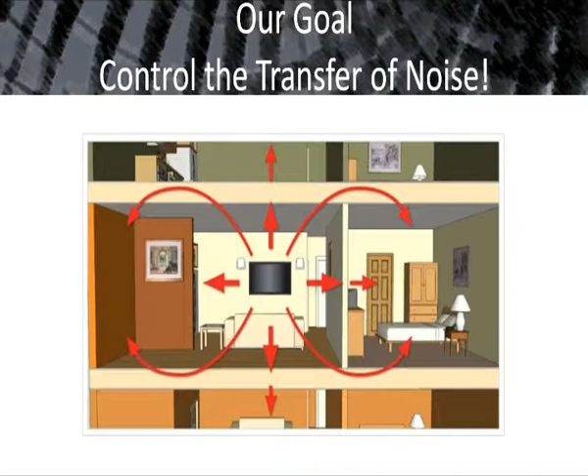So can anyone tell me what the building code is for entry-level housing? STC 50, thank you. All right, so entry level is giving us a STC rating or an ASTC rating of 50. That's what the code says we have to have between units.

What do we have to have between market rate? Does the code talk about that? 50, very good, there's no difference. What about for luxury? 50, okay. So the building code only speaks to minimum quality construction from an acoustical point of view, and that's our challenge.

How many people here are architects, designers? How many people are developers? Engineers? Manufacturers, building component people? Okay, a few, all right. So we got a good group.

So these are our challenges, is establishing expectation. And our biggest expectation issue is when marketing gets involved. We may be sitting at those design team meetings and the expectation is, oh, this is going to be market rate, and all of a sudden the flyer comes up and it says it's luxury grade. Those are our challenges.

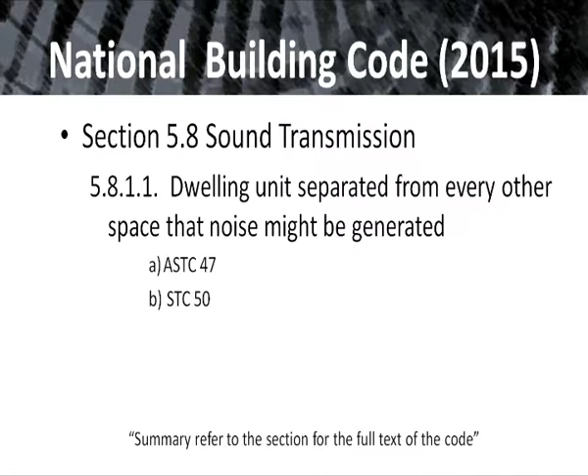As we go further, they're looking for elevators or sleeping units within the same area to be separated by 47, so say in a hotel type facility like we have here. Elevator shafts and trash chutes, those types of things - they're looking for a rating of 55 separation, which is great. We don't have anything like that in the States, it's just 50.

A part that the Canadian Building Code is silent on is impact isolation. So that's the footfall noise, that's the thump thump. That's the person walking around in the hotel room above me all night long, thump thump thump thump thump thump. So that's a challenge.

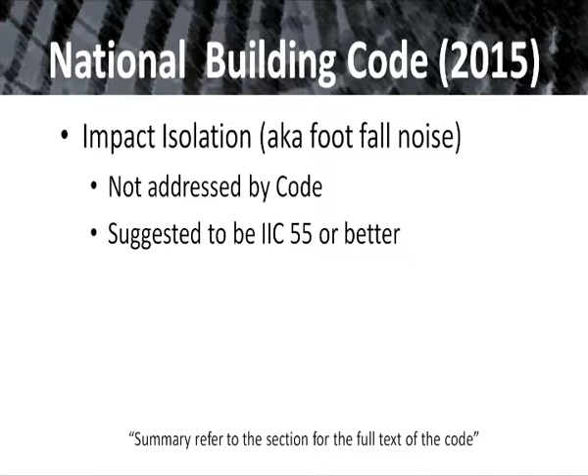Something else that we're looking for is exterior to interior. Now that is not an issue as much here in Canada as it is down in the south where our Raleigh, Durham, and our Orlando offices are, because typically the windows in my house in San Francisco aren't insulated.

Now I grew up about 50 kilometers south of here, in Michigan, and went to school about 300 kilometers north of here, again in Michigan, in the middle of Lake Superior. I know what cold is, just as you do. So having the thermal wrap of our dwelling units takes care of most of the exterior to interior acoustical issues that we have. Having gaskets on doors, windows that are sealed, building insulation, that takes care of it. So that and fire ratings are my two favorite friends. If I have a fire rating of an assembly, that's generally going to help us acoustically.

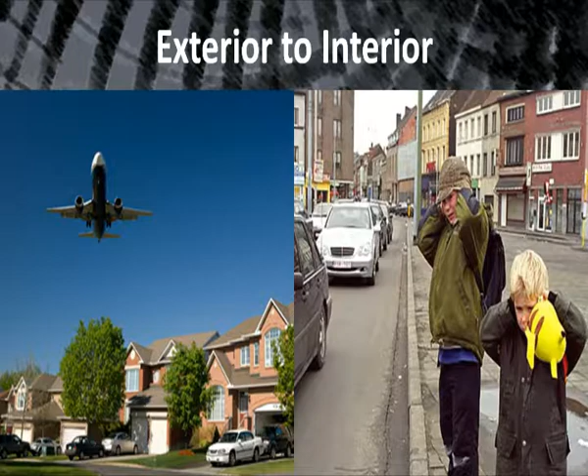Challenges we have when we get into mixed use is what is that separation? This is a project that we did, 2 miles south of our Raleigh-Durham office. We talked to them about having isolation between the commercial units on the lower level and the housing above, 3 stories of housing above. Wood frame - they wouldn't listen to us, said oh no, it's not a problem.

Well, we got a call in - how do we fix Buffalo Wild Wings when they have open mic night? Not only is it loud, it's also bad from the units above. 2 of my engineers were in this complex and they all broke their lease and moved out because it was too noisy.

So when we start looking at this, we're dealing with commercial to residential complaints. This is typically a nuisance complaint that the police will come out and deal with, if they happen to get out there at the right time to measure it. Obviously they don't have a lot of time to deal with nuisance complaints from noise, but that's how commercial to residential is generally dealt with. Even though we've got that STC 50 requirement, if it's exceeding that or making excessive noise, it's going to be a complaint to the police department.

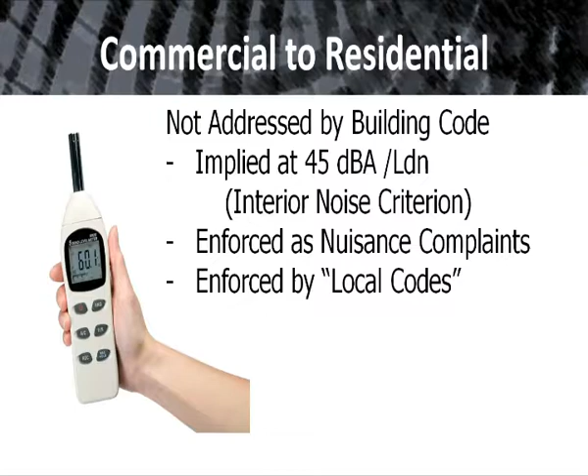Okay, some really great things going on here. Next week in Ontario is 2 days of classes - it's Acoustics Week in Canada. The Research Council is going to be doing some presentations there. If you've got a chance to go over there, they're going to go into more detail about how to calculate ASTC.

Robert Marshall from Certainteed is going to be in here - there you are - and talking about ASTC in more detail later on today. So I'm not going to go into a lot of detail on how to calculate that.

So we've been throwing around some terms - let's help define this. I'm in an industry of jargon, second only to IT. So when we start talking about general terms that you hear about in acoustics, there's noise reduction - how much sound is measured from one side of the wall to the next, how much is it reduced. It could be exterior, it could be interior, but it's noise reduction.

A-weighted sound pressure levels, that's kind of what our ear hears, and that's what you're going to have on your sound level meters, more cheaper single-digit sound meters. That's going to be used for environmental noise - how loud is the environment. Those metrics are used with day-night average sound levels, community noise equivalent levels, and then we start looking at windows to provide that isolation.

That's going to be outdoor-indoor transmission class, OITC. When we start looking at partitions, and we're dealing with sound, we start with sound transmission class, STC rating. That's a single number that's measured in a laboratory - we'll show you some pictures of the labs coming up - of how much sound that partition is going to block. It's a lot like, if you want to think about it, like a fire rating, but we're dealing with sound.

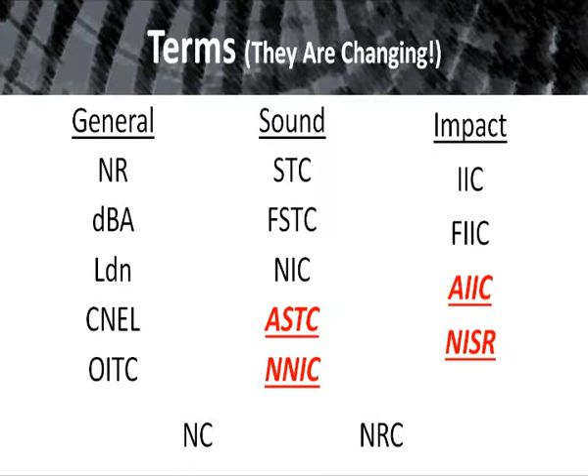If you haven't seen the curves I'm talking about, the curve on the left of the screen, that is an STC contour, that straight line, or the segments that are relatively straight, the three-segmented curve. That is the sound transmission curve, established by ASTM. On the right-hand side is the impact isolation curve. That three-segmented curve is also established by ASTM. We measure and figure out what the difference is in the sound from one side of the wall to the next, and then do a curve fit.

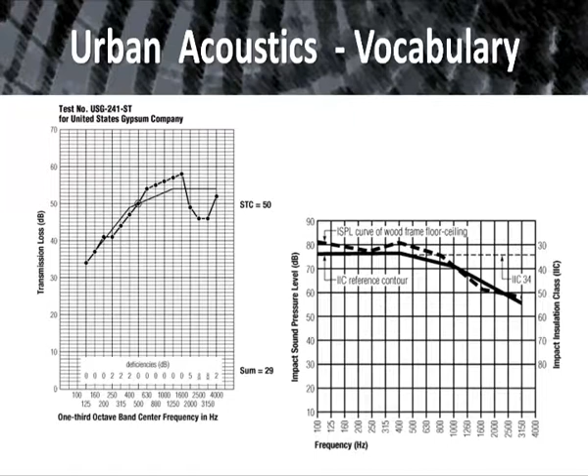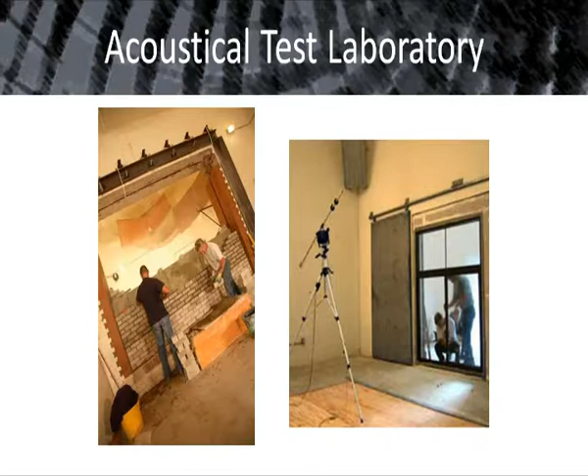So here's that acoustical lab where we would be doing the STC testing. It's a very, very thick and massive wall. The only weak link is going to be that opening in the middle of the wall, about 100 square feet, a little less than 10 square meters. The partition under test is built into that opening, sealed airtight. Then we create a tremendous amount of noise on one side of the wall, and then measure it typically into a reverberation chamber, which is on the right-hand side of your image.

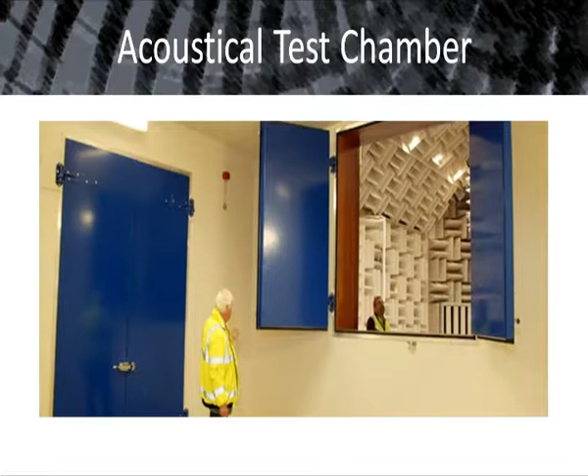That difference gives us and allows us to calculate the STC rating. Again, STC is just the partition in the laboratory. ASTC is going to take into account all of the different paths, the flanking paths through the floor, as sound travels over the ceiling, all the different paths.

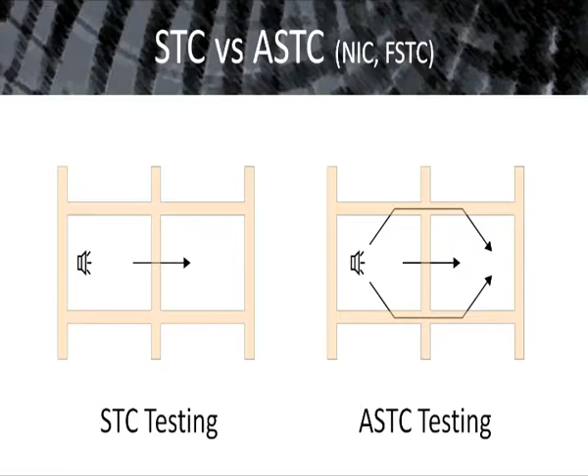For IIC, we're not using a loudspeaker, we're using a tapping machine, and we'll see more about that in a bit. So that tapping machine gives us the ability to create a known sound level overhead, and then we can measure all of this, the sound level in the room below through all the adjacent paths, directly through the floor, and through the walls that is being re-radiated.

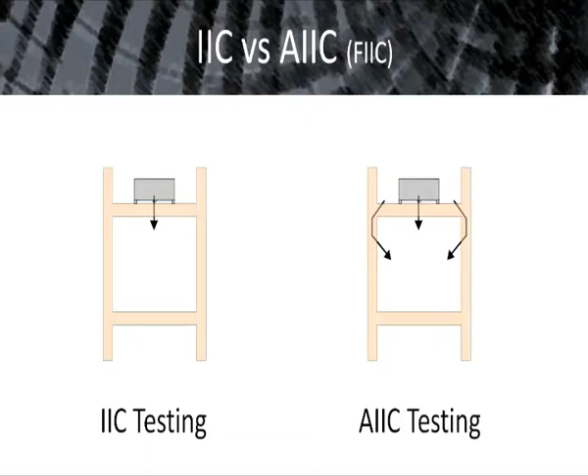So after we've done our measurement, let's say our goal here is our code goal of STC 50. So that's the STC 50 line in blue. We measure the sound levels in that room below, and we get what's measured on the red line there. Now the way we calculate an STC or IIC rating is a twofold true-false test. I can only have 32 deviation points below the curve, and I can have no more deviations in any one band than 8.

So as you look at this, you can see at the bottom there, it's 60 deviation points if you add up all the numbers below. And at that one frequency, we've got 10 deviation points. So this partition that we measured does not meet STC 50. It's substandard, if STC 50 is what it was supposed to do.

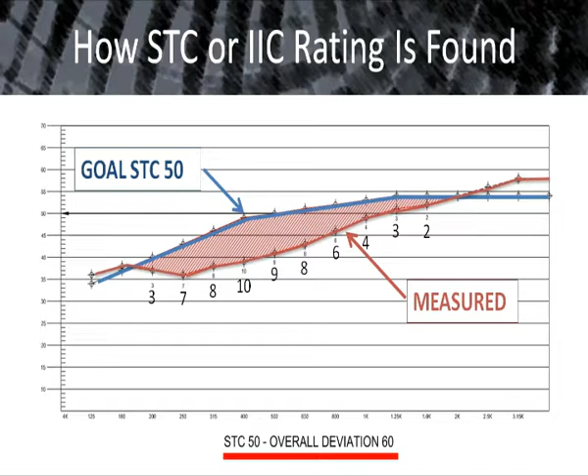So we move that curve down 1 point all the way across. That becomes an STC 49 curve then. And these are referenced off from the center frequency at 500 hertz. So if we look at, let's see, do we have a mouse here? So we look at that knee point right there. That's our reference point. We still have over 40 deviation points.

So we move the curve down again. We're still over 40, but we're just now at 8 points for that one band. We move the curve down again. We meet the 8 points, and we've got our 31 points of deviation. So the partition that we tested was not an STC 50 partition, but rather an STC 47 partition. So if this was in the field, this would be ASTC 47.

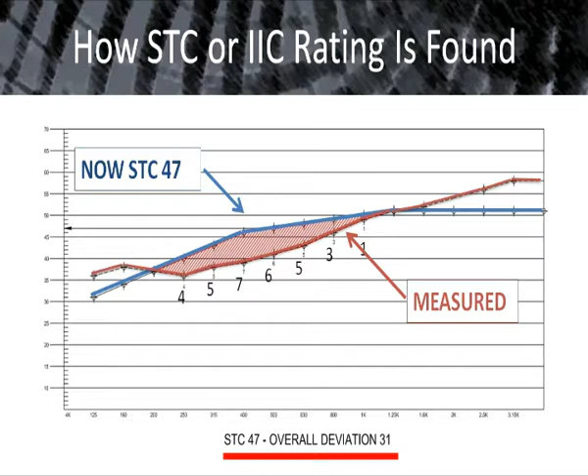That's the process we go through. A lot of people have asked about it. It's not that complicated, but that's the steps we go through in determining what the STC or IIC rating is. The biggest takeaway now that we've covered the terms is there is no silver bullet. I cannot provide a building made out of concrete, a building made out of steel or metal, or a building made out of wood that meets the STC ratings we're looking for on its own. It has to be a combination of materials and systems. Regardless of how we're putting it together, there's not one building method out there that achieves the acoustical ratings all on their own.

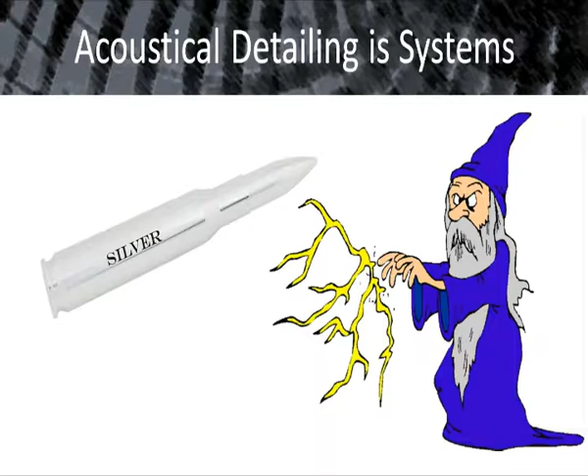So let's look at the wall systems. Acoustically, we assume that our walls are full height, structure to structure. We assume that our walls and joists are insulated with some type of thermal insulation, open cell thermal insulation. We assume that they're sealed airtight around the perimeter, gasketed. For flooring, acoustically, I want them glued and screwed. I don't want those nails to pop out, and I do not want the nail squeak as people are walking around.

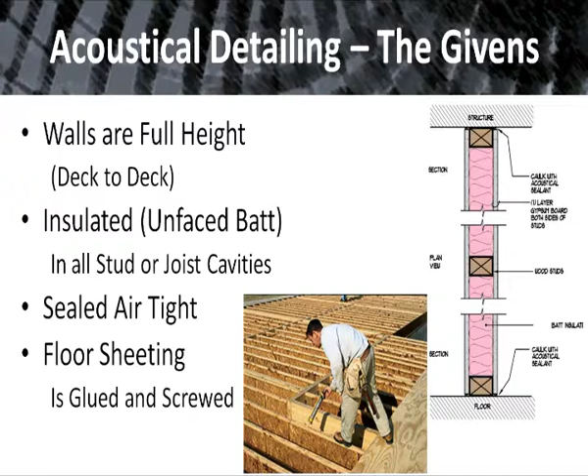So when I went to Lowe's this weekend, or Wednesday, to check on price, for 30 cents a square foot, I can add that insulation. That is the cheapest way we can improve the acoustical isolation in any of our systems - make sure that the stud or joist cavity has insulation in it. Typically, we're looking to either fill the cavity or have at least 6 inches of it in the cavity. We're looking at joist cavities.

When we go to the next progression - 2 layers of gypsum board on each side, so we've got a total of 4 layers, plus insulation - we're only up at STC 45. So that really doesn't deal with our demising walls between units, and may deal with demising walls in the hotel. To get to STC 50, we have to add some type of resilient system, and historically that's been a resilient channel. So here we've got a single layer of gypsum board on one side, an insulated stud system, a resilient channel, and then 2 layers of gypsum board on the outside. That gets us to STC 50.

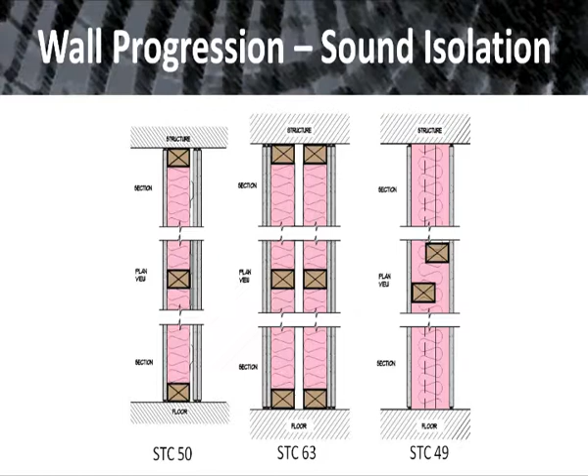We talked about that resilient system. Most commonly, it's considered a resilient channel. Metal channels are not all the same. The top one's a hat channel - everyone should be familiar with that, I hope - basically looks like a hat. The bottom one is a resilient channel. The resilient channel does not have that top leg, so it's meant to float off from the structure. Now the challenge is the installation of the resilient channel, and all resilient channels are not created equal.

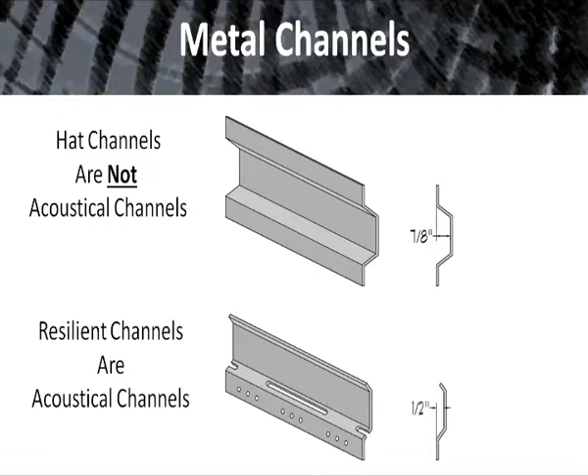One of my colleagues out in Seattle gathered this test data. The middle channel is what's historically known as an RC1 channel. This is the channel USG developed many years ago that's been used over and over again. If we look at the ratio of open area to closed area in that slot, it's about 4 inches open and about 1 inch closed. So roughly 80% of that leg is open, is resilient.

The channel at the top was the next one they developed. They routed it out instead of punching it. Evidently it was faster and cheaper, and it still performed the same.

The other three channels, 2, 4, and 5, are not the acoustical channels we'd recommend. Whenever we've done destructive testing for expert witness work, we've always found those channels in place, and the partition didn't test well. When we went back and tested using the USG channel with that larger ratio of open to closed area, we've not had a problem.

One of the other challenges with resilient channels, and we'll see photos of it, is that the channel is only 1/2 inch thick. If the crew on the job site doesn't know where the framing members are and they screw through the gypsum board, through the channel, into the framing system, we've just short-circuited the springs in our system. That resilient channel is no longer resilient, and you've just spent a whole lot of money and labor for nothing. That's one of the major challenges.

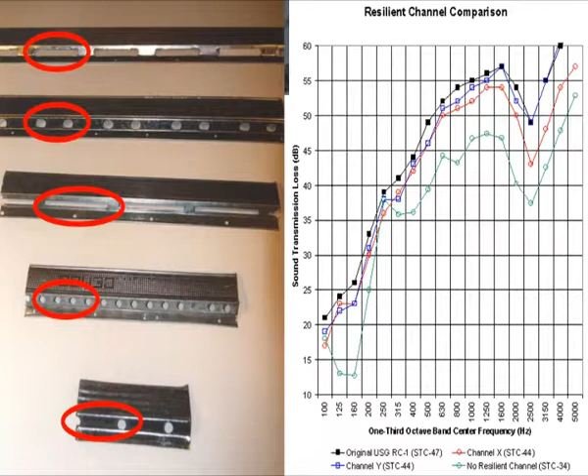So we're looking at hockey puck type resilient systems, as I call them, where we attach an isolator to the framing system, whether it's wood, a wall, or a ceiling. Then we have the ability to snap a hat channel in. The hat channel is about 7/8 of an inch, so it's standing off the framing system by about 1.5 inches by the time we're done. We've got 5/8 inch gypsum board, maybe 2 layers of that. So as long as the drywall crew doesn't have deck screws in their bag, we should be fine — they won't be able to screw through the gypsum board, through this resilient system, into the framing.

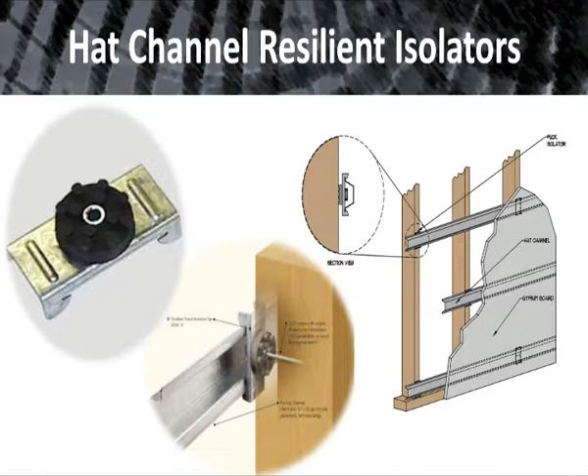Yeah? How are we doing? Is this going okay? Too fast, too slow? Just right? Okay.

As we look at how these are installed, this is a really good system. Material-wise it costs more, but we don't need one of these hockey puck isolators at every framing intersection. They can typically be used 1 in 3, every 3rd stud or every 3rd joist for the hat channel, because the hat channel is stiffer, supports the load, and can carry that weight. So I can have someone quasi-skilled understand how to put these in and mark them up easily, and then have unskilled labor hang the sheetrock.

Lot lines, the next great issue. A lot of times in acoustics, less is more, and this is one of those examples. So I've got my double stud wall, my favorite wall, and the airspace is exaggerated here just so we can go through this. We've got 2 layers of gypsum board and the airspace — that's STC 63.

If we're going with a lot line for fire issues, a lot line wall with fire separation requirements, historically it's been built with something like detail number 2. Here I've got 6 layers of gypsum board total, and it performs substantially worse than my 4-layer system.

That's due to 2 things. I've got a trapped airspace between my walls. How many people here can compress a basketball or a football? Anyone got the ability to do that? It's a sphere, it's trapped air — we can't compress that. That's the same thing that happens: those 2 walls vibrate together because of that trapped airspace. Then I've got resonance in the building construction because I've got 2 identical systems.

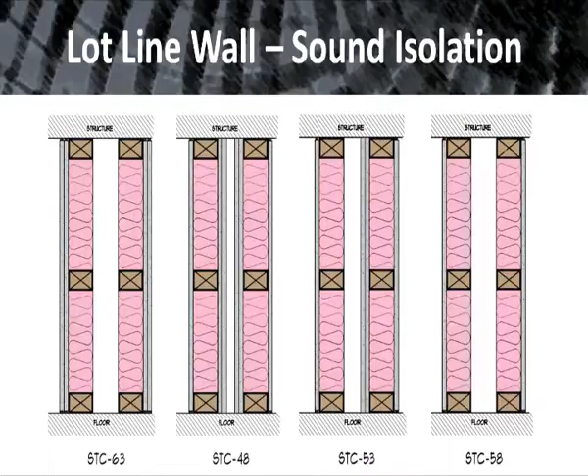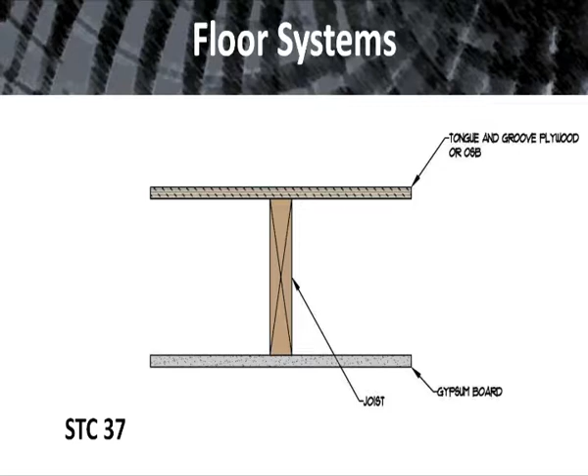Floor ceiling systems, just like our food chain for acoustics. We've got our standard 2-by system, joist. We've got a layer of gypsum board screwed to the bottom, a layer of plywood on top. We're at STC 37. I insulate it, we jump up to 43. Again, that insulation for 50 cents, 30 cents a square foot, 6 inches, that was 40 cents a square foot.

Very, very inexpensive for a substantial improvement. So if you ever wonder why the kids were so loud upstairs and you have a standard house that doesn't have insulated floors, that's the reason.

As soon as we add a topping slab, gypcrete or lightweight concrete, we get almost to STC 50. We're at STC 49. Maxxon, or Gyp-Crete at the time, did test this report about 20 years ago, this system, and they got to STC 50 and there was a big stamp on it: don't use it, we don't believe it.

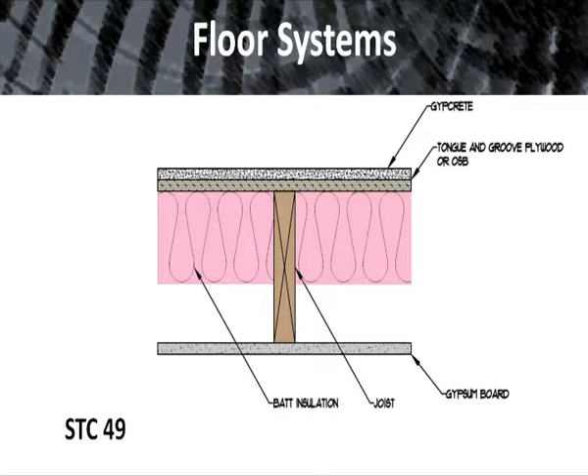It was right on the edge. So we like lightweight concrete to add additional mass. It helps seal the bottom of our partitions, adjacent partitions. That additional mass really helps us. It stiffens up the system. It provides better low frequency, better thump noise control.

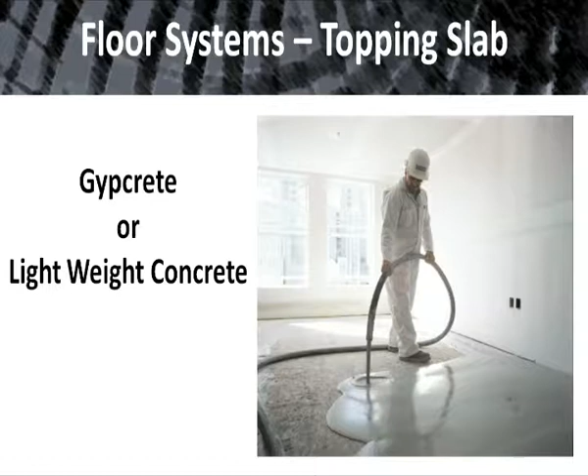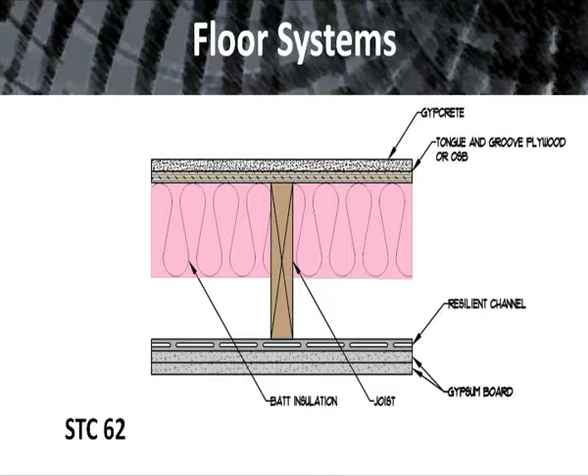We're not going to get any better until we start doing studio construction. It doesn't matter what that framing system is. Now we've got lots of data on 2-by material. Weyerhaeuser was great when they came out with their truss joists many, many years ago. They went through and did round-robin testing to prove that that product worked the same acoustically as stick-built framing.

That's what we need from more manufacturers as we're identifying these. I don't have data from parallel chord trusses. I don't have data from open web trusses, but we know that at that thickness, those depths, it's going to perform essentially the same acoustically as a stick-built or an I-beam joist or I-built system.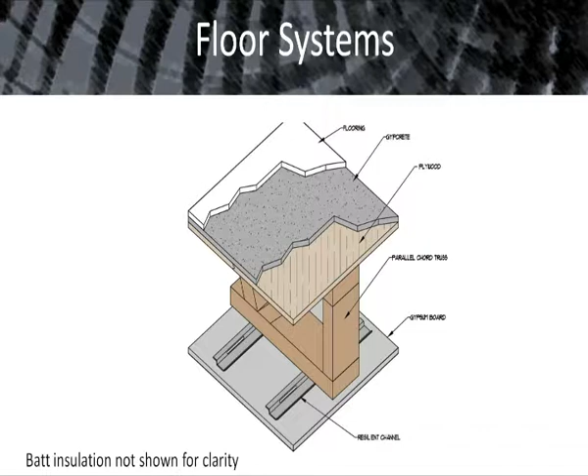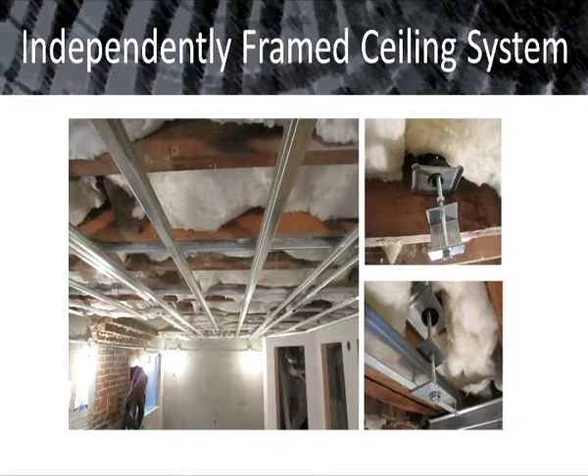How many people have been in a building where they've been jackhammering or saw cutting? And how far did you have to go in that building to get away from that noise? Out of the building, okay? That's the challenge we have when we've got impact noise. We want to make sure that we're reducing that noise at the source.

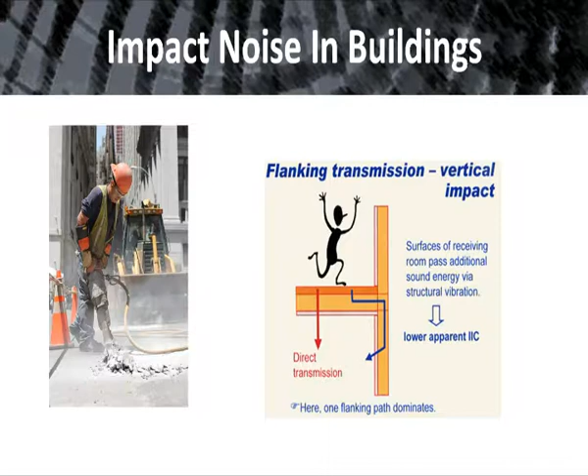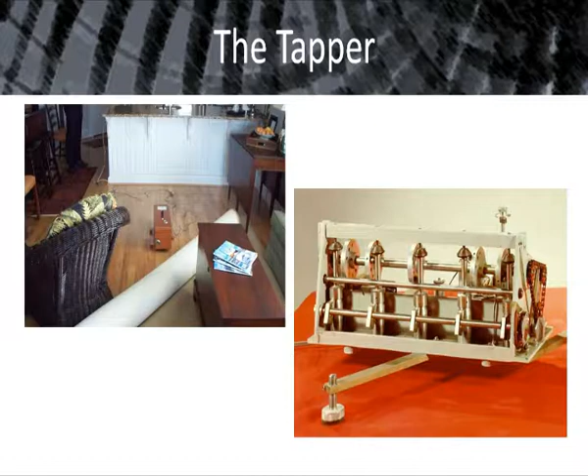So we have approximately a 10 hertz tone, 10 cycles a second. Every hammer drops twice, 5 of them, and that creates a repetitive noise. Rat-a-tat-tat, rat-a-tat-tat, rat-a-tat-tat, rat-a-tat-tat. And that's what we measure downstairs. This is an ISO ASTM calibrated box that creates a known noise source. In the top right corner, you can see the hammers just starting to touch.

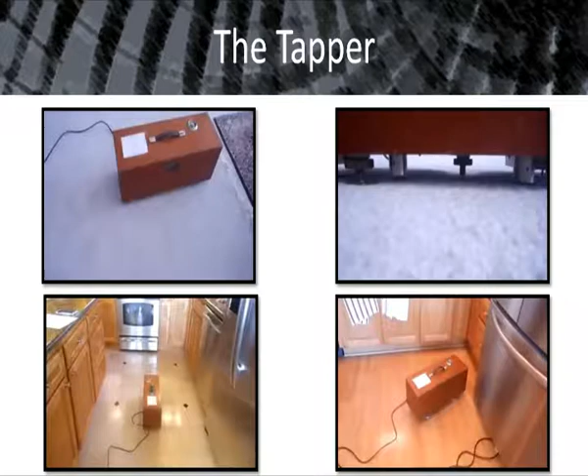If we can add some type of acoustical mat to our subfloor, there are a lot of different options. We've got stuff for wood, we've got stuff for gypcrete. They're all going to work great from an acoustical point of view. I don't work for them.

That's going to absorb the noise, reduce the transfer of noise in the space. So if we look at the food chain of our STC 56 wall or floor ceiling system, we've got the batt insulation not being shown right now, but we've got it there. And we start looking at gypcrete, bare gypcrete, we're at impact isolation class 32. If we go to tile, we're at 43. Cushion back vinyl, we're at the mid 50s. Thin carpet, heavy carpet, we're 60 and 70.

Because of the carpeting, that's the best thing. It's soft, it's absorptive, it deals with the footfall noise. So for all of you architects and interior designers out there, this is the reason you're going to start putting carpet in your kitchen and your bathrooms. We want to carpet the entire building.

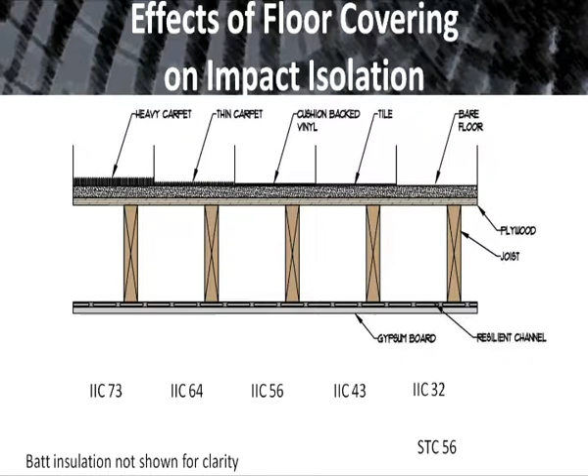CLTs, how many of you had a chance to use CLTs? How many of you are looking at it? Okay, download the CLT handbook. The stuff we're going to talk about is out of one of their chapters there. I was not part of developing the acoustical section. I went through and researched the CLTs on my own, and lo and behold, we agree. I'm happy.

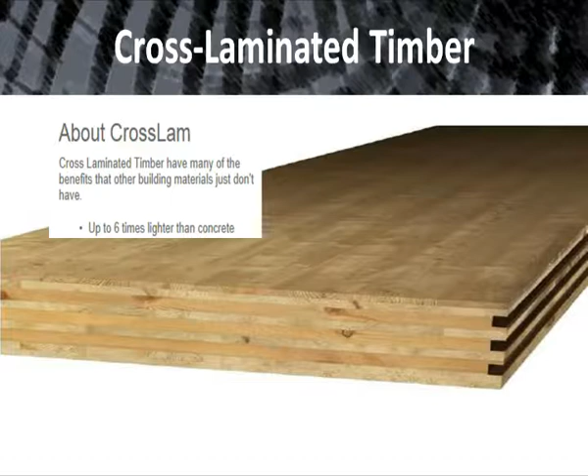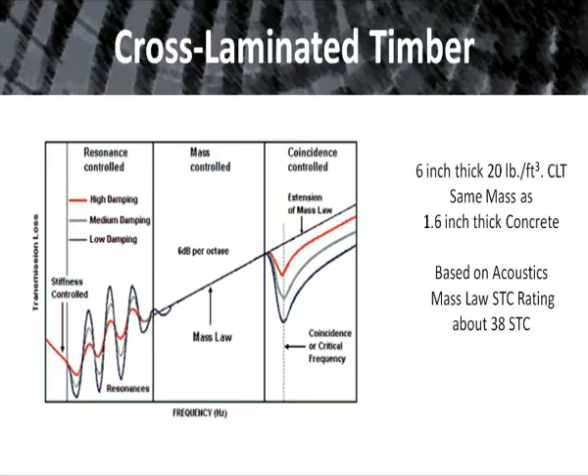So with a CLT, a 6-inch CLT is about the same as 1.6 inches of concrete as far as mass. I know what 1.6 inches of concrete does from an acoustical point of view. So a 6-inch CLT should perform the same way, and it does based on the testing that has been done. So it's a lightweight mass system on top. It's not the same as concrete, but it's a lightweight system.

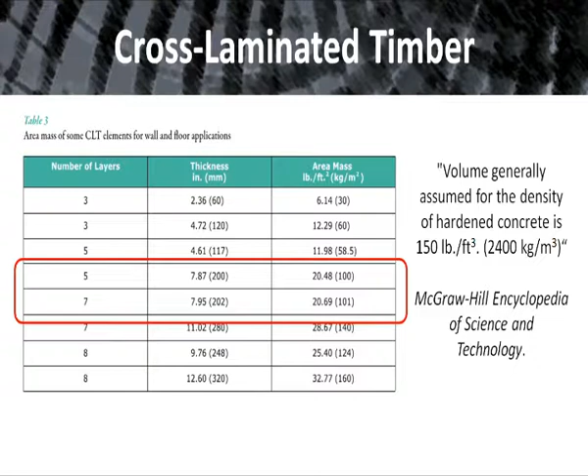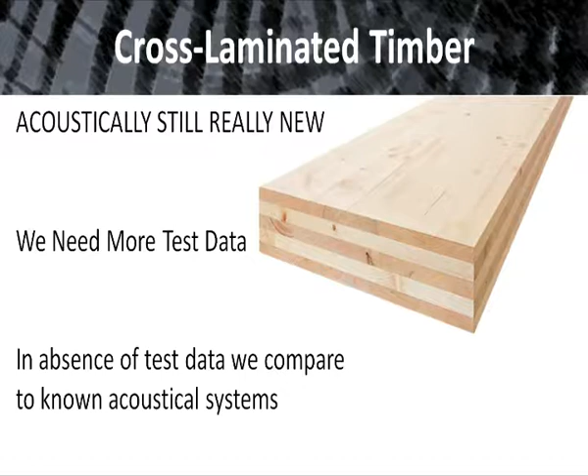So again, we're going to have to look at and use supplemental resilient channels, different things, if we're using this as an isolation system between units, between dwelling spaces, between commercial facilities. We can start to see that IIC on their own, they're in the low 20s, which is what we would expect from a very thin piece of concrete. And we can see the STC ratings are in the mid-30s, again, what we'd expect from the same material. So it's going to have to be used in combination with something else. Great material, makes sense, but again, we've got to look at the big picture.

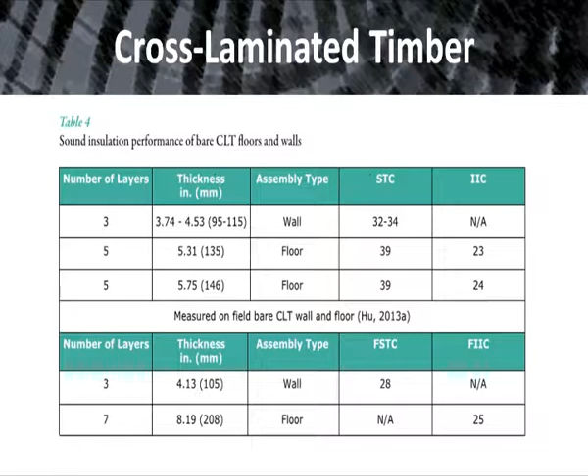Looking at the food chain again, starting on the right, at the low 35s, going up to heavy carpet, up to the high 70s, mid 70s.

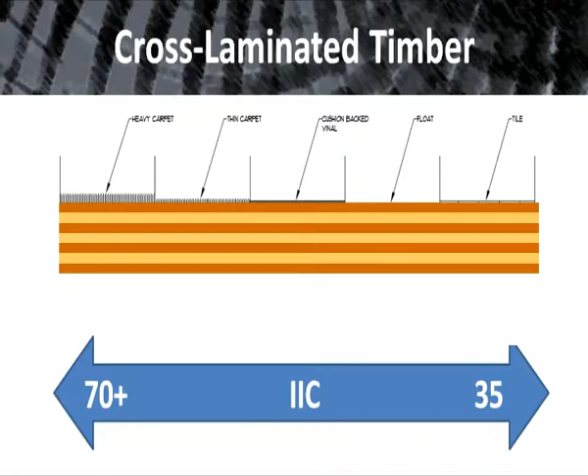I really don't have to tell you this, whether I'm talking to folks in North Carolina or San Francisco. We want things sealed up airtight. Wherever air can flow, so will sound. So we want our electrical boxes, party walls sealed airtight, and our doors sealed airtight. We want high quality windows.

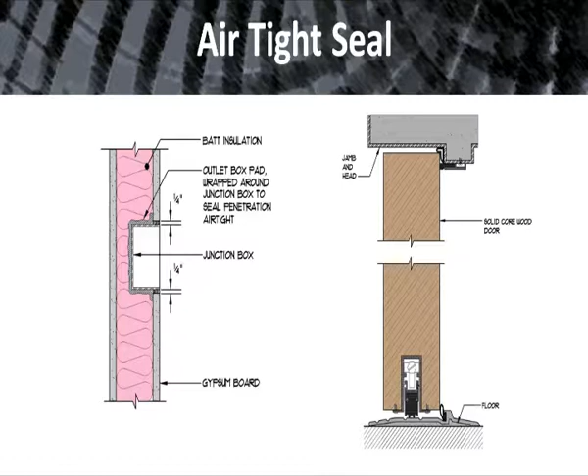The insulation we put in our walls needs to be some form of open cell insulation acoustically. Blue jean material, mineral wool, fiberglass, cellulose blown in - all of those are fine.

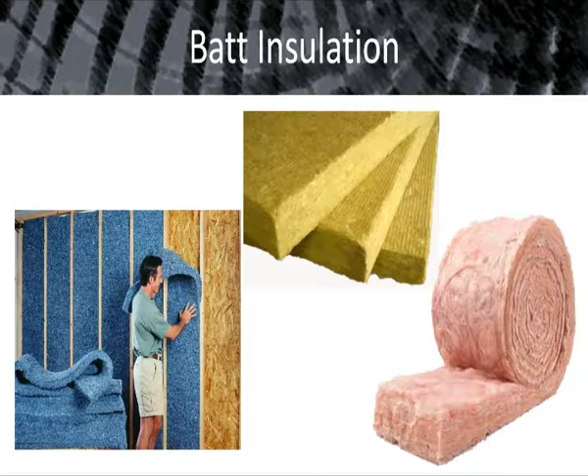Where we have problems is when we fill a cavity with closed cell spray foam. Closed cell foam is great for the air infiltration barrier, but because the cells are closed, sound cannot get inside of it and interact with the material. It's a barrier for sound intrusion, because we want the sound waves as they vibrate to interact with that loose fill - that's how we get that reduction, that big bang for the buck.

So if we're using closed cell for air infiltration, we want to make sure we also have a second lift of open cell, or come back in and do additional batt insulation for thermal, and do a hybrid combination.

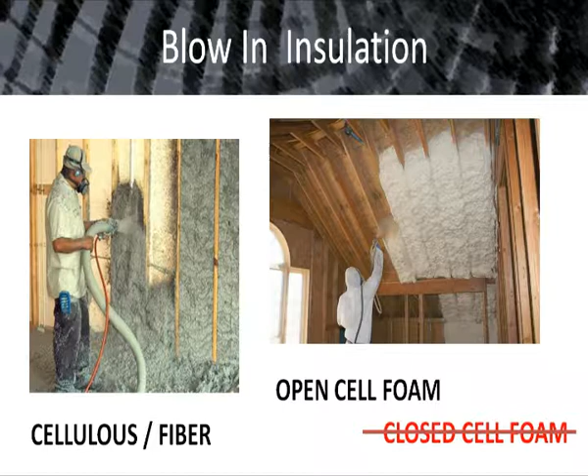Rigid foam, because it's closed cell, doesn't help us at all. Doesn't help us at all.

Other things to consider - fiberboard. Back in the 50s, this material was tested in the States, and when you read the test report, they glued the material to the framing system and glued the gypsum board to the fiberboard. If you have a code official that will allow you to do that from a construction point of view, by all means use fiberboard. Otherwise, my recommendation is run quickly away from it. It doesn't help us acoustically because of the lack of mass - because I'm going to screw through it into the framing system, so I lose any resilient properties that fiber material had that vibrated back and forth. It's a great carpet underlayment, but it doesn't work acoustically, in my opinion and from the test reports we've done.

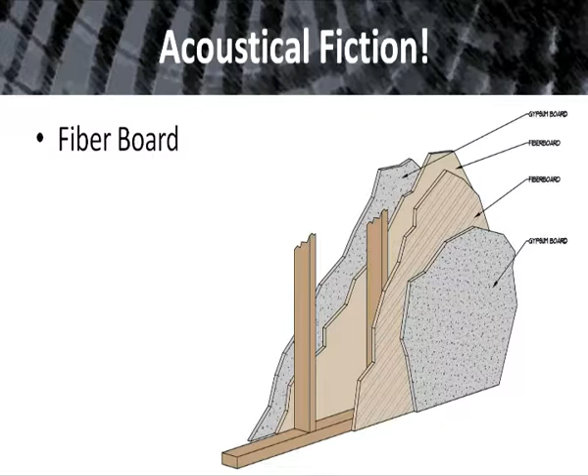Adding a resilient channel - coming into problems. All of a sudden we're not getting adequate sound isolation from one side of the wall to the next. Let's just put on a resilient channel, another layer of gypsum board. Two challenges there - anyone tell me what they are?

Trapped air, trapped air, okay - same issue we had with the trapped airspace. Very good. What's the other one?

How short of a drywall screw can you have? Most of the drywall screws they're going to have is what, 1.25 inches? 5/8 gypsum board if we're lucky, 1/2 inch resilient channel - that gives me an extra 1/8 of an inch of that drywall screw that's going to penetrate into the substrate below. So again, it's no longer resilient - they've screwed into the structure. You are much better off if you're going to do this to get the sledgehammer out, hole saw, however you want to deal with it.

Bash a bunch of holes, cut a bunch of holes in the existing finish system. Put the channel up so we don't have that trapped airspace. You'll get a substantial improvement, as well as work out all your frustrations for the week.

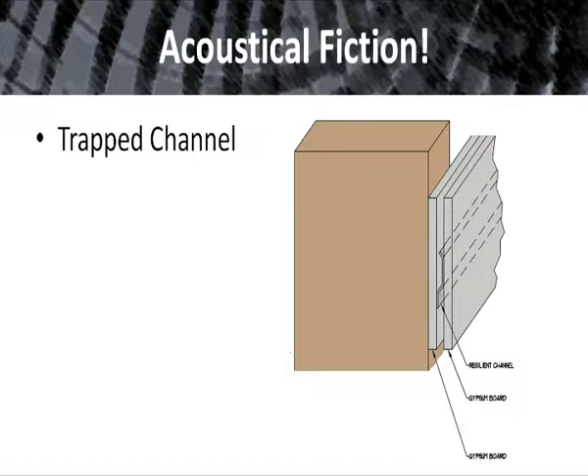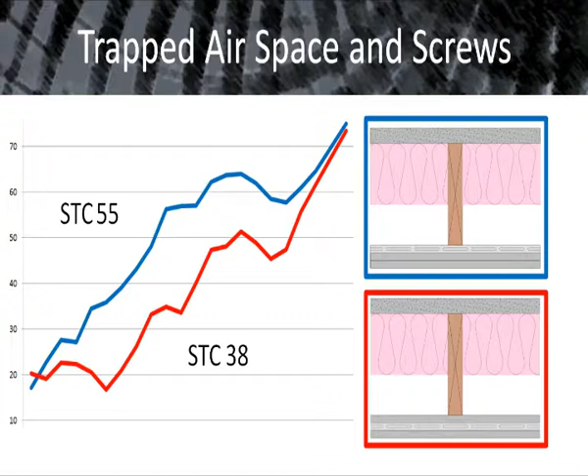Here's an example off the internet of someone building a studio. How much money have they invested in doing those multiple layers of gypsum board and putting resilient channels in there, trapping air? This is an example of what not to do. So be very, very careful when you go out there and look at resilient channels on the internet.

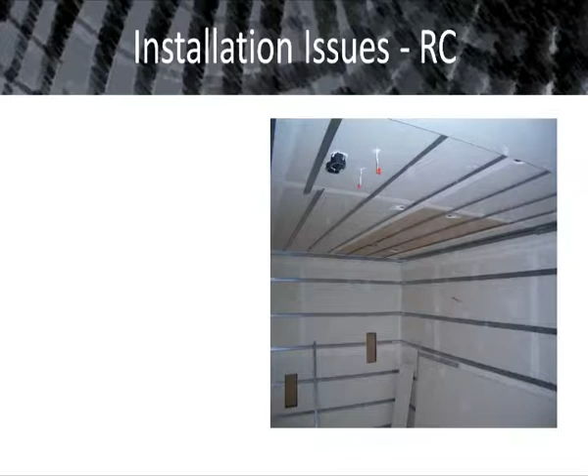Plumbing noise - how do we keep plumbing noise out? That's a big complaint that a lot of people have. We want to make sure that the plumbing noise is taken care of, and that it's properly isolated.

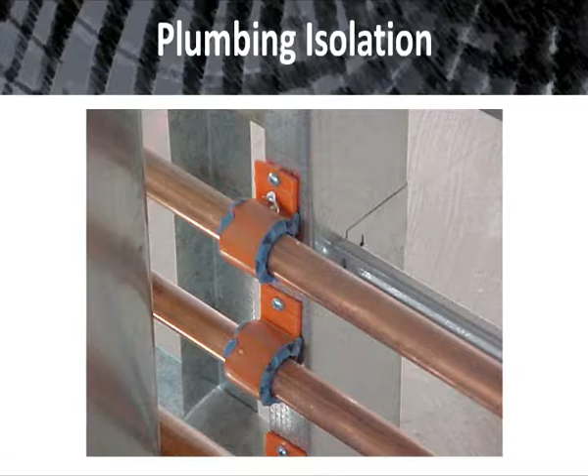Condensers - starting to do multifamily housing, mixed-use spaces, when we have condensers on the roof, got to be careful with that. If they're not adequately isolated from the structure, we're going to have noise.

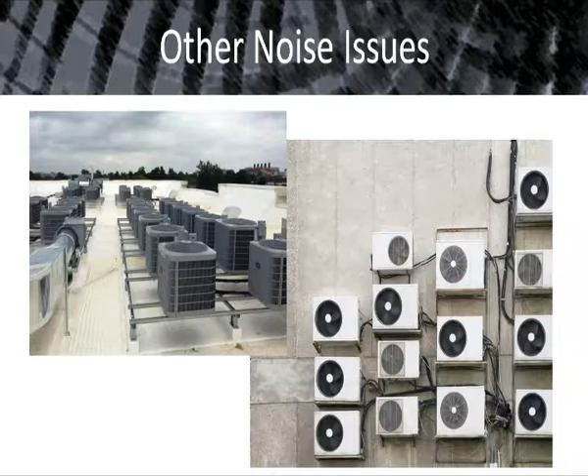Recessed light fixtures, ductwork for heating and cooling, all of those create holes in our acoustical ceiling. Ideally, we're not going to have those penetrations. We're going to do something with track lighting. If we're going to put recessed light fixtures in, we're going to be dealing with soffits and things along that system.

Ductwork, if we're having duct come in, I want to have approximately 6 feet of internally lined sheet metal duct connected to the diffuser. And then we can go back and do our flexible connection to that ductwork.

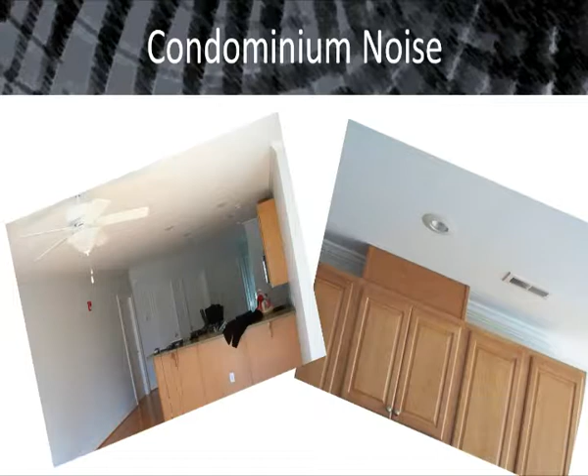This was a project in Oriental, North Carolina, the sailing capital of North Carolina.

Resilient channels put on parallel to the joist. We always want our resilient systems that are attached to the system perpendicular, so we create a lattice contact, not a parallel contact. And then we had all kinds of other fun things.

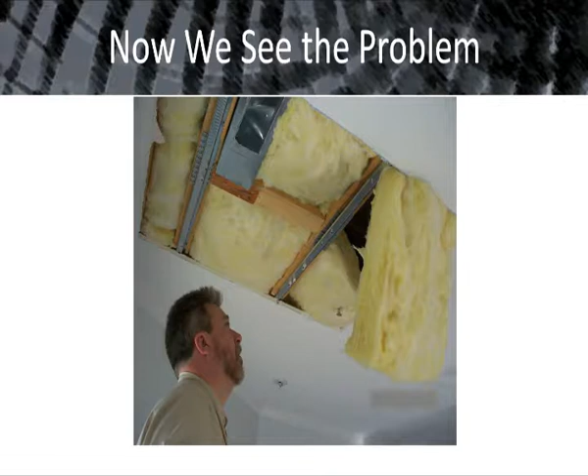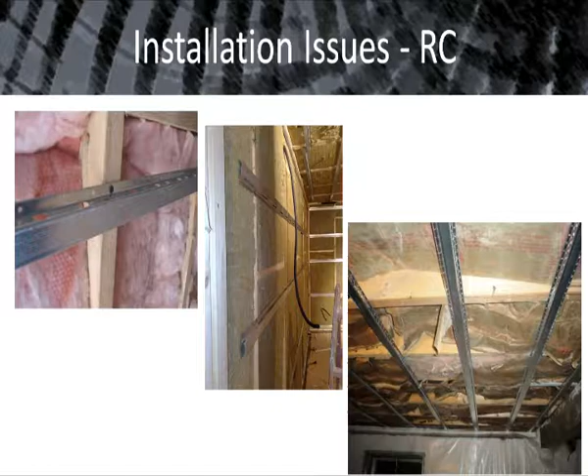Again, channels that are put in backwards. If you look in the center, to the left of the center channel, you can see screws that are put in through the gypsum board directly into the system. We've short-circuited all of our systems.

This is the problem. I don't like resilient channels. I like resilient systems, but I don't like resilient channels. Two of these screws in a living room will totally defeat all the money and effort that's gone into that process. Sprinkler heads, how do we properly connect those and have an adequate isolation?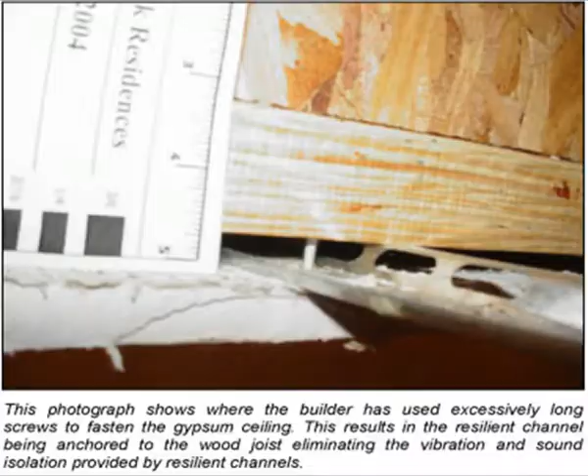Ductwork, boxing those. These are all the checklists and the things that we need to look at. And this is the horror story. I'm trying to scare you. I really am. We can do things well, but we've got to have a good crew that's building it.

The best design that we come up with is going to be screwed up in the field 19 times out of 20.

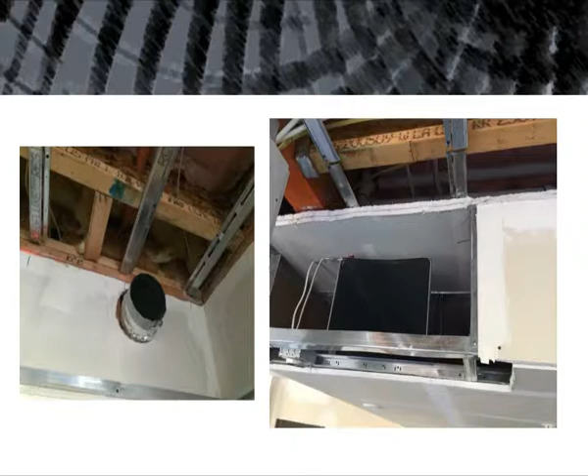This project here was done perfectly, and they were still complaining. This was in northern Idaho on the ski hills. It's so quiet there, they were still complaining that they could hear what was going on downstairs, even with the best acoustical detailing.

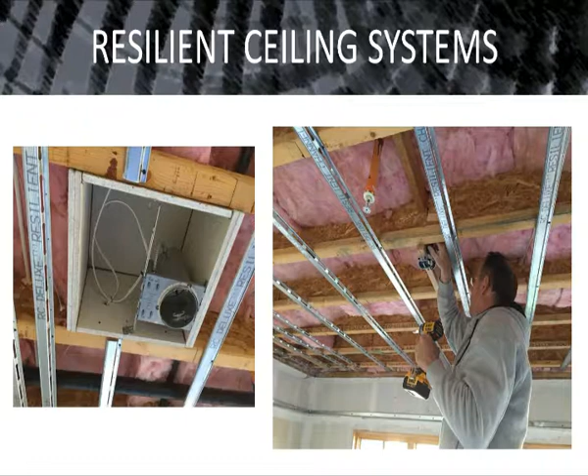This was that connection of the ductwork being crimped, and sound coming in, in Oriental, North Carolina. So think about flex duct. There's nothing there, there's no mass, there's no isolation. Sound gets into the joist cavity, travels, breaks into the ductwork, comes out of the diffuser.

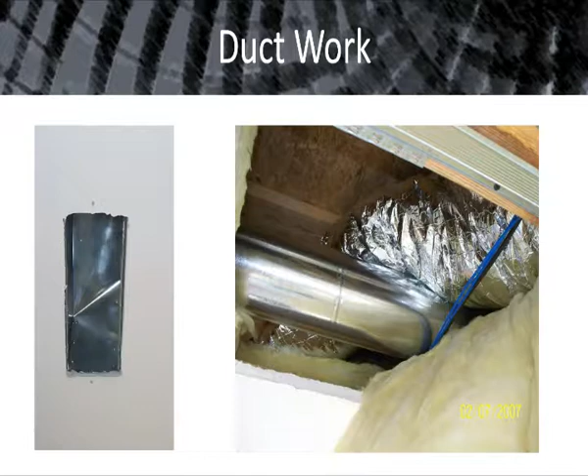Insulated contact cans, good, they're sealed airtight. Three or four of those are okay. A ceiling full of them, no.

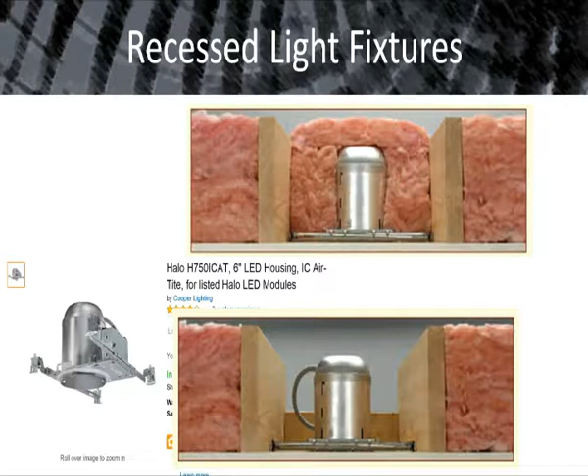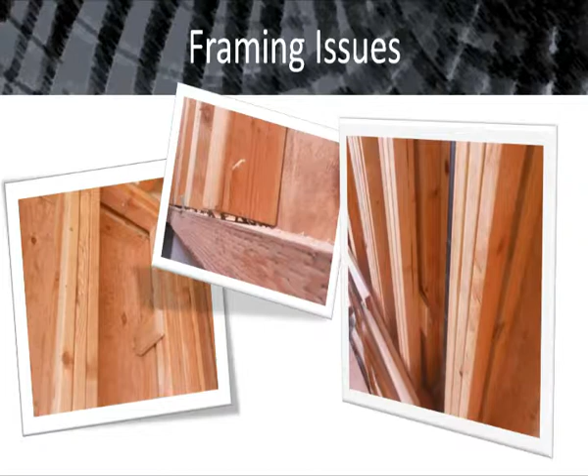Other framing issues, this is just scary. I've got to go back to San Francisco and do a walk on this job site here, and hopefully they've corrected all these squeaks that we're going to have. Blocking - they didn't take out blocking as they were putting up walls.

SoundBreak, gypsum board, acoustical board, makes sense. It's like plywood, it's like laminated glass. We're just now getting good acoustical test reports.

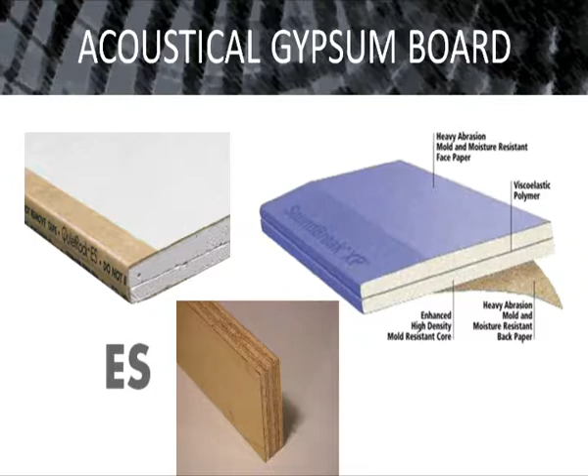Damping material, adding glue in the space, again, it's kind of like that laminated gypsum board, helps out. We've been doing this for 40 years with USG. Other companies are starting to market it.

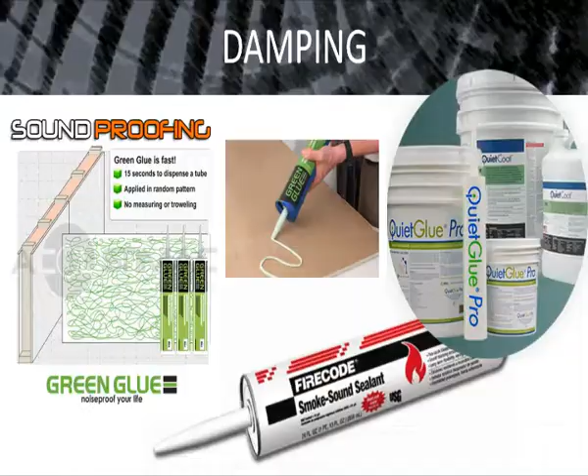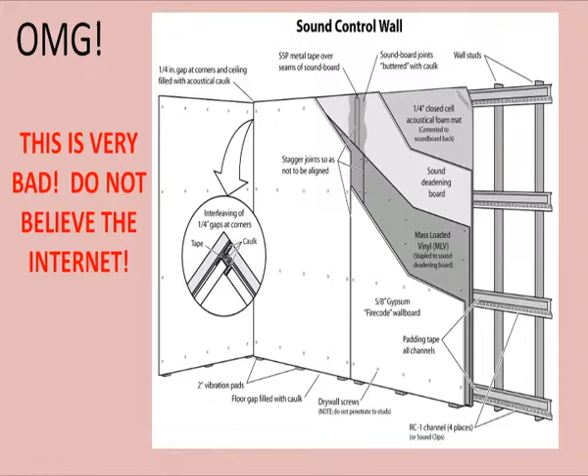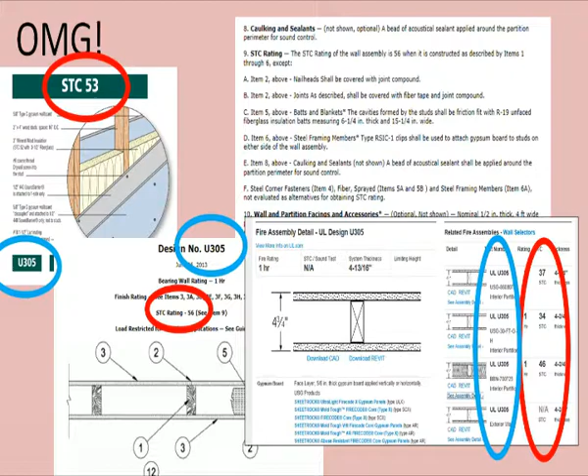Going back to the fiber board, we can't track and make acoustical partitions and follow the fire code the same way. If a partition is a 1-hour partition and we're doing something built similar to that, we can say it's a 1-hour system, we can make that inference. We can't do that with acoustics, and this is what one company has done to get their acoustical ratings. They've said because it's U305 or whatever assembly, and they follow that through, it becomes the acoustical rating. No, it doesn't.

So while this is tongue-in-cheek, be very, very careful where you get your data. Get it from a reputable firm. You guys are great up here because you've got the Research Council, and I refer and rely on them. So if they've said something is going to do X, Y, Z, it's great. Let's deal with that. So with that, let's open this up for questions.

Yes, sir. Do we glue our drywall to the resilient channel? No, we do not. And it's not the recommended process by what I'll go back to as the authority, which would be USG, because they developed the product.

Yes, sir, you mentioned the weakness of when you screw drywall through into the studs, you short-circuit your resilient channels together. I take it the same happens with anything you're attaching to the wall, like upper cabinetry. So the question is, as we're dealing with resilient channels and attaching materials to that, if we screw through the channel into the framing system, yes, we're going to short circuit it.

As we deal with cabinetry, I would urge you to go back and look at the USG handbook, which shows how to add additional resilient channels and how to fasten cabinetry into the channels behind the gypsum boards. So there are ways to deal with that, and in some cases it's actually fastening them vertically into a soffit that's been isolated. There are different methods of dealing with that, but we have to be careful about how that's being done. Good question.